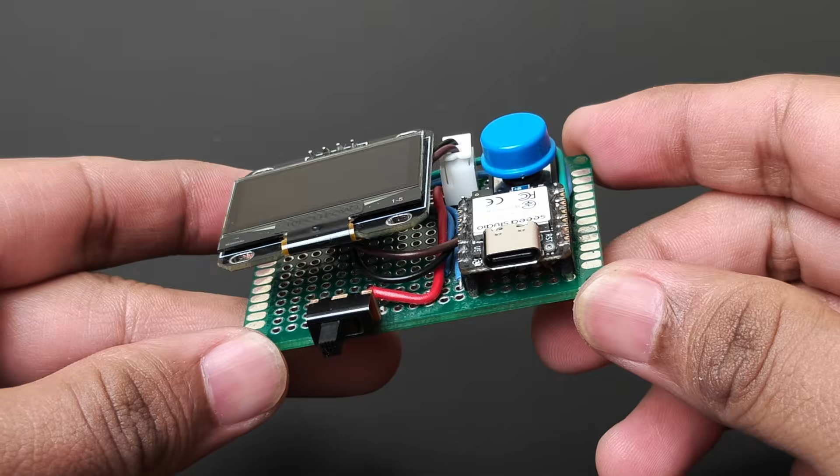Today, I'll show you how to turn your prototypes into finished products. Right now, this is just a bunch of components and wires. We're going to design and 3D print a proper enclosure for this project using Autodesk Fusion. The final result will be a small portable device with an OLED face, fully enclosed, clean, and professional. Fusion is free for personal use, so go ahead and download and install that.

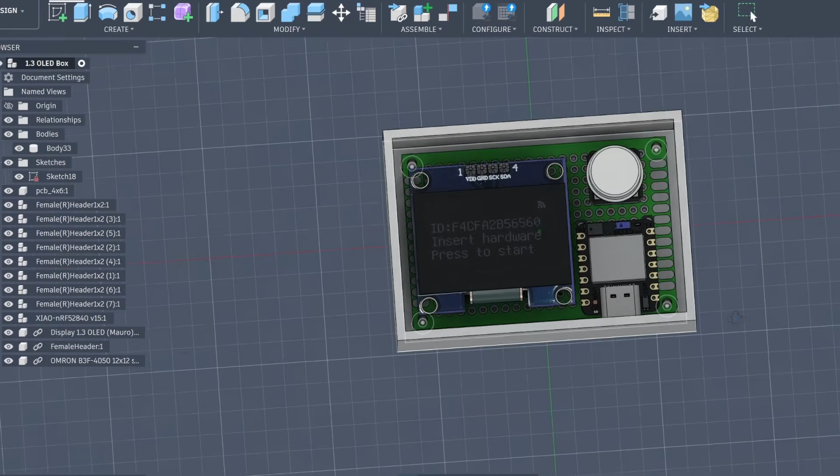Create a new project. Now, there are two ways in which I design an enclosure. Method 1, which is my preferred method, is importing 3D models of the components into Fusion and designing around them. Method 2 is measuring everything manually with calipers and recreating the geometry yourself. I'll show you both. Most companies provide the 3D files for their development boards.

For example, the Xiao board's 3D files can be found on their wiki page, and most other components can be found online. My favorite place to grab these 3D files is GrabCAD. They have a ton of designs uploaded by the community, but make sure to check the licenses before using any of the designs.

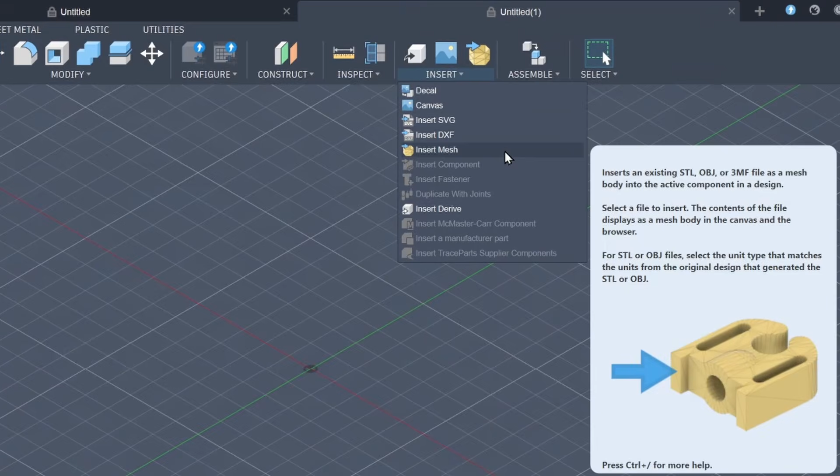Once we have all the 3D files, in Fusion, go to Insert, Insert Mesh, select From My Computer, and bring the model into your workspace. Let me import all the models. I have put all the components in the right place. To move or rotate an object, you click on the object and press M. This activates the Move tool, or right-click and select Move. Now you can move or rotate the object.

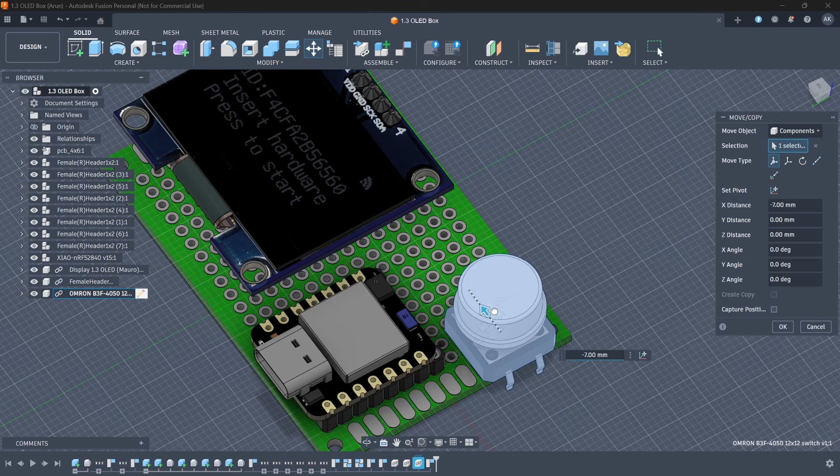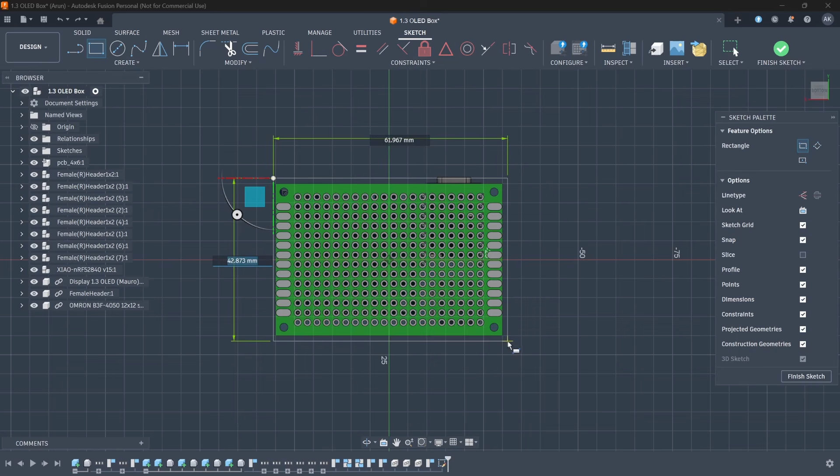Now you can start making the enclosure using solid objects. But a better way to do it is using a sketch. Click on the surface where you want the sketch to be, and click on the Sketch button. Now, draw the base shape of the enclosure. You can simply use the shapes to draw your sketch, but you can also use the Offset tool. Select the Offset tool and click on the outline of your biggest component, and drag it. This will be the inside of the enclosure. A 5mm gap is safe.

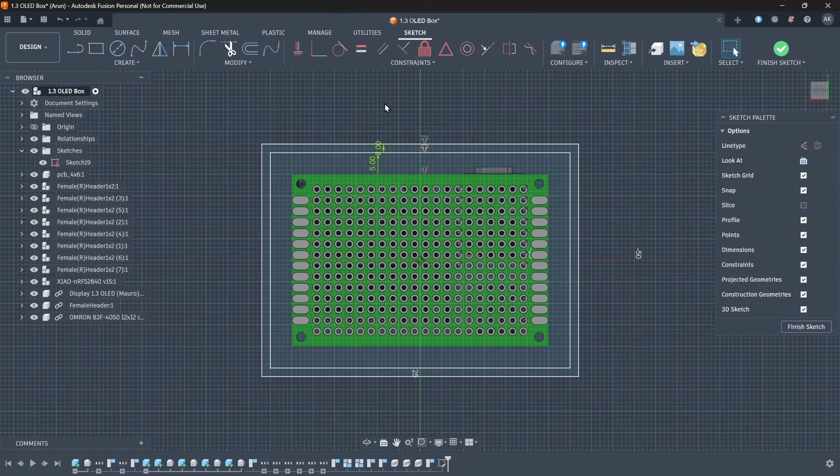Use the Offset tool again to make the walls. I like my walls 2 to 3 millimeters. And to secure the PCB, I want to add screws, so I'll make some standoffs. For this, I use the circle tool. The dot you see there is the center of that existing hole. You can align to it. And I think we're good.

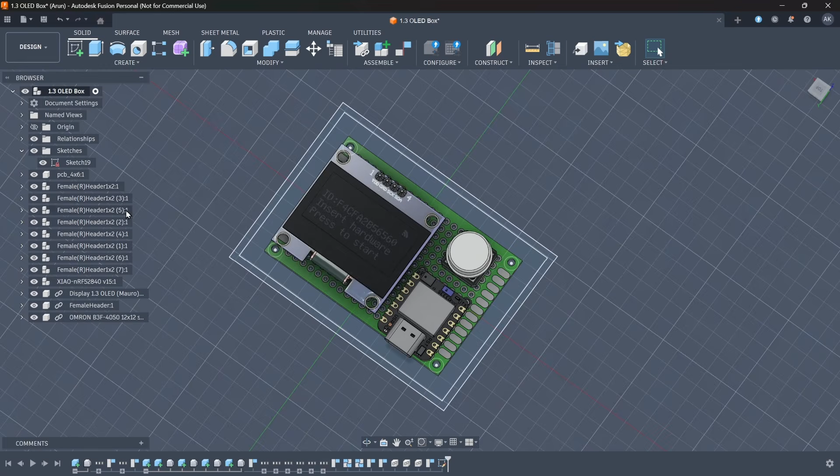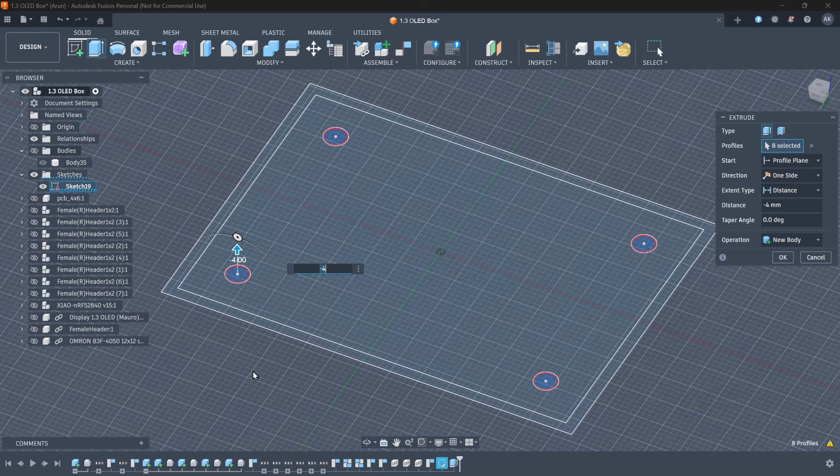Save the sketch. Next, we have to make the 3D shapes from the sketch. And for this, we will use the Extrude tool. Press E or select Extrude from the Create menu. And select everything in the sketch. And extrude it to 4 millimeters. Then select the circles and raise it according to the length of your screw. Go to the options on the right side and set the operation to Join. This will join the new object with all the objects it is touching.

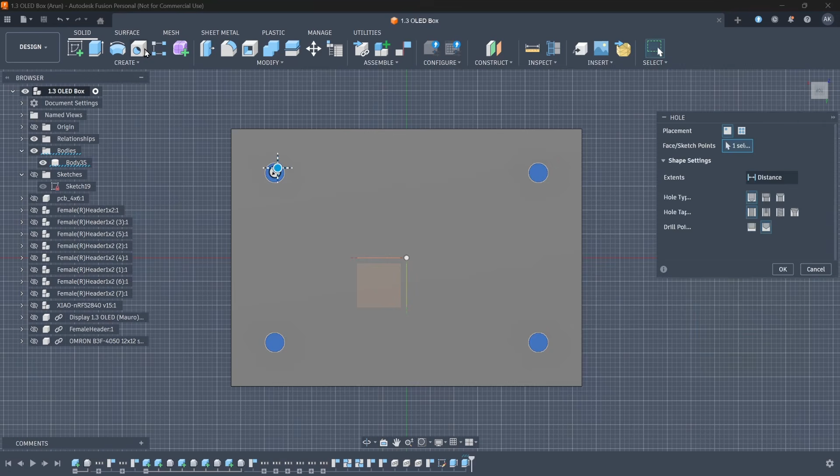Next, we add some screw holes using the Hole tool. Self-tapping screws can be easily screwed onto 3D printed objects if the holes are the right size. The screw holes have to be slightly smaller than the screws you're using. So if I'm going to use a 2mm screw, it should be 1.9mm or 1.8mm. This will be different for each printer and filament, so you'll have to get this right by trial and error.

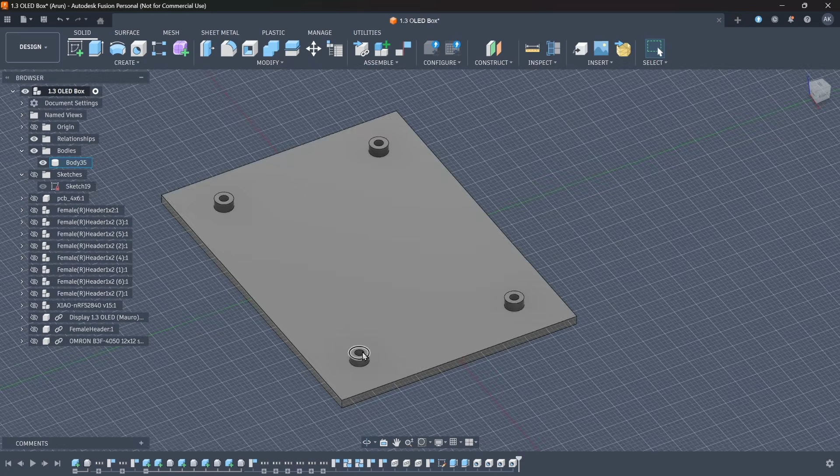Next, select the outer wall and raise it till the top of your project. And if you're unsure of the size or don't trust the 3D models, you can measure your project and enter the height.

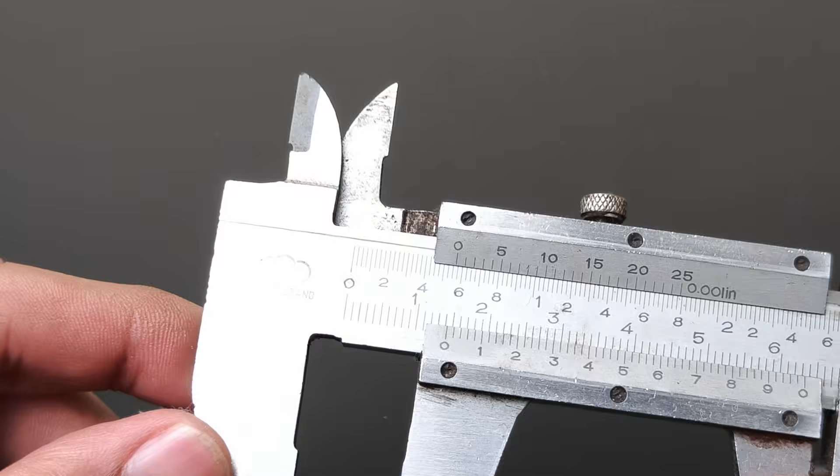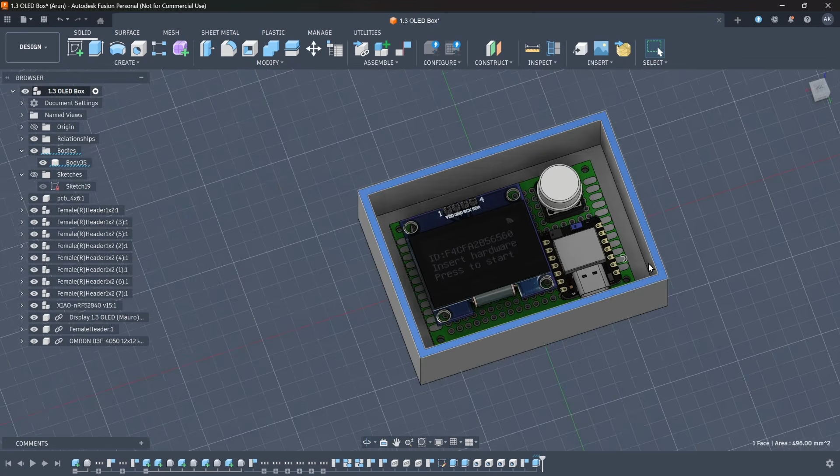Next, we need to close the enclosure. Select the top layer of the wall and extrude, about 2 millimeters. But this time, we want to create a separate object for the lid, so set the operation to New Body. And we get this separate object. Next, select one of the inside faces of the lid and extrude it. Make sure you hide the other object while you do this, or they will merge together.

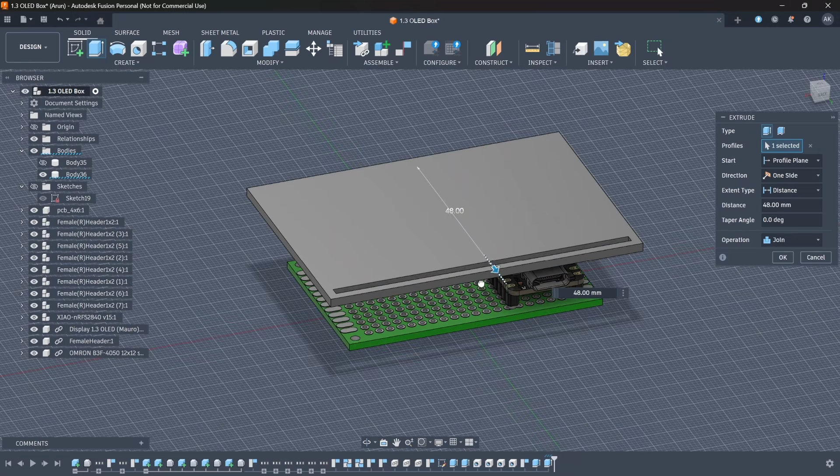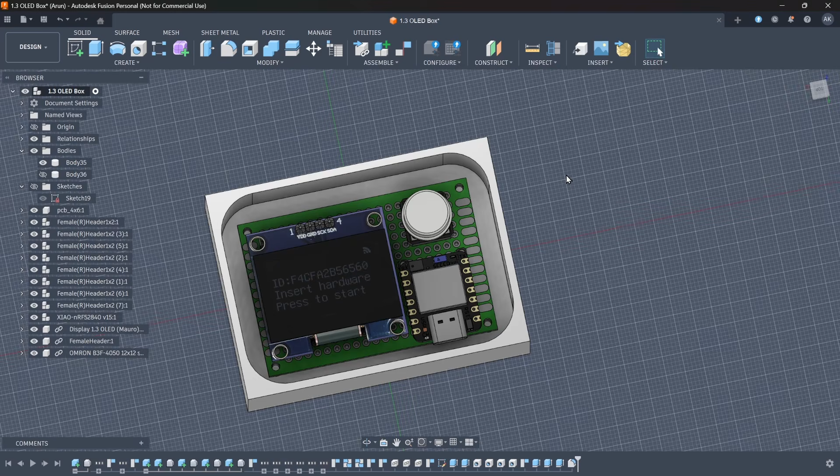Next, let's make the corners a bit rounded so that there is space for some screws. To do this, we use the fillet tool. Select the corners and move them. Do the same with the lid.

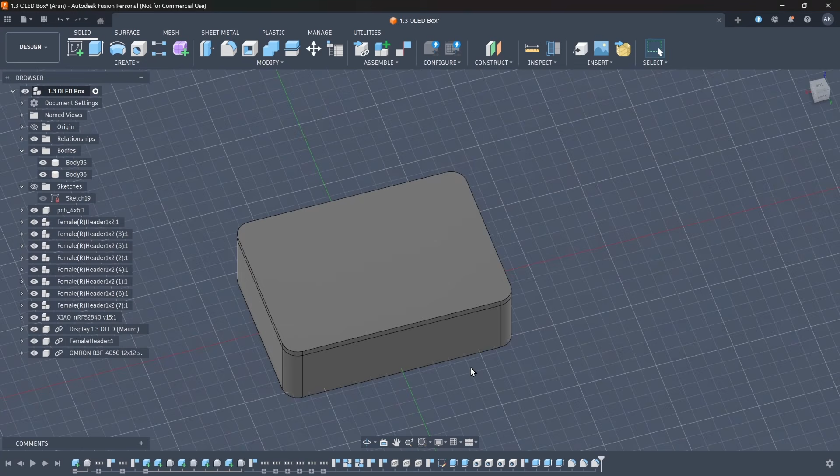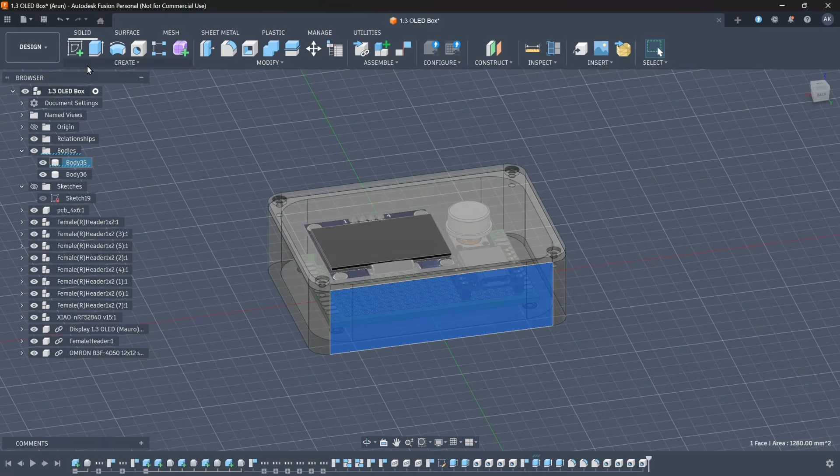Now we can add the screw holes. This time I am making a hole with a counterbore so that the top of the screw can go into the hole and sit flat. That is about 4 millimeters. Finally, we need cutouts for the USB port and the switch. I can do this by adding a sketch here.

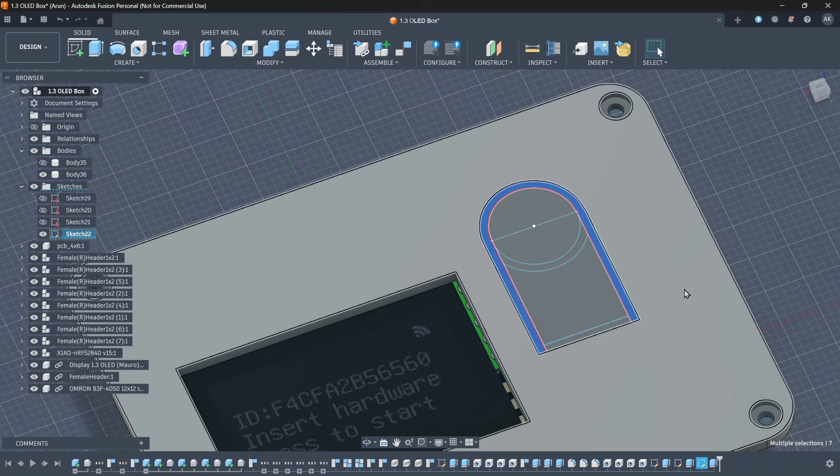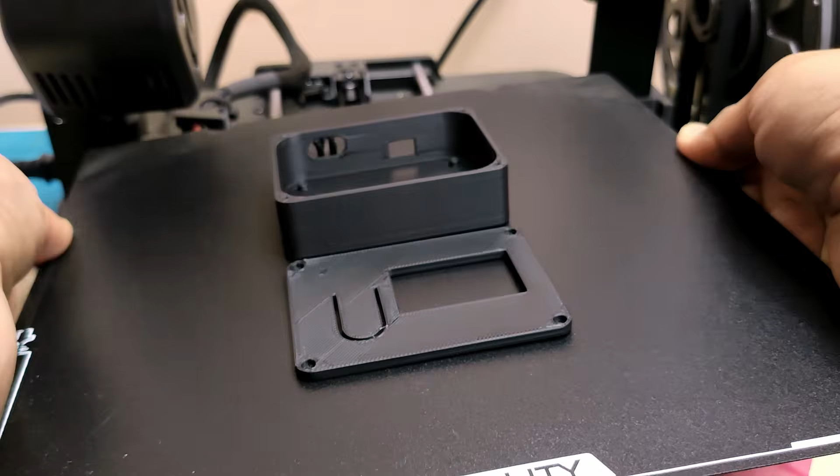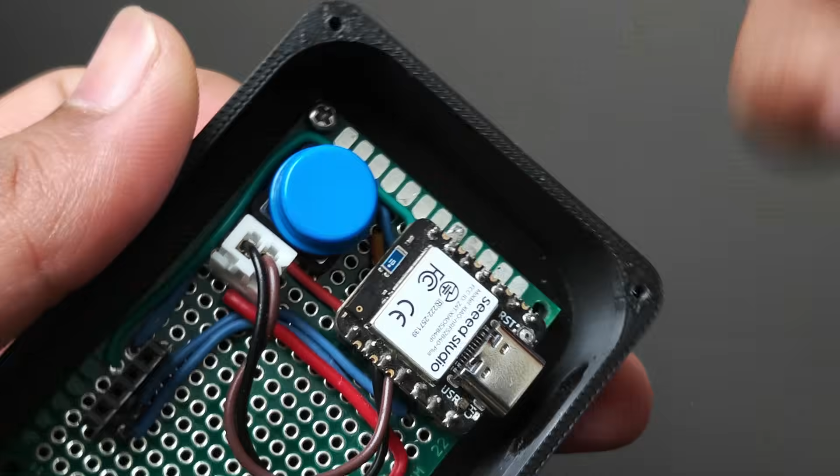To make the STL files, select the object, go to File, 3D Print, and save the file. Now all we have to do is print it. There you go, prototype to product.